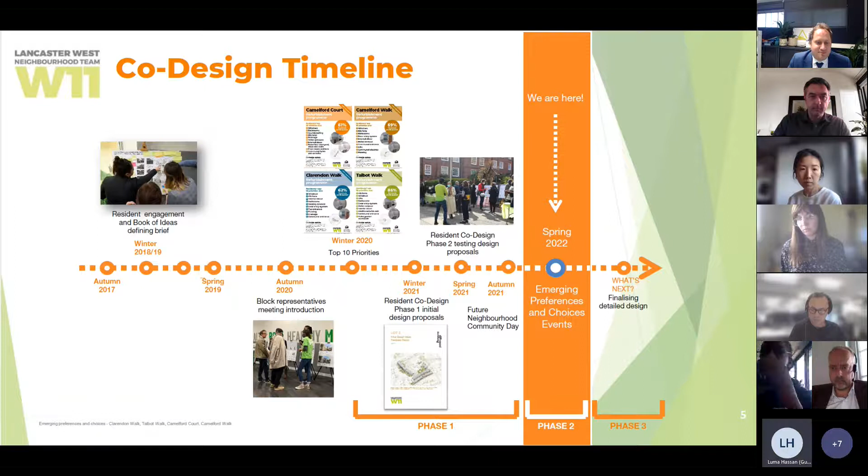Great, thanks James. So just a quick update. Since we last met at phase 1, and also at the Super Saturday event last October, we've been focusing on two key work streams. Firstly, we reviewed your feedback from phase 1 to understand what the key preferences were, so we can focus development in the right areas. Additionally, we looked at where there were concerns, as James said, and explored whether we could offer some variations or alternatives to address those.

So in order to develop the proposals, we needed to do a bit more data gathering to understand the buildings better. So the second work stream has been survey research and analysis, so we know what we put forward to you is potentially possible.

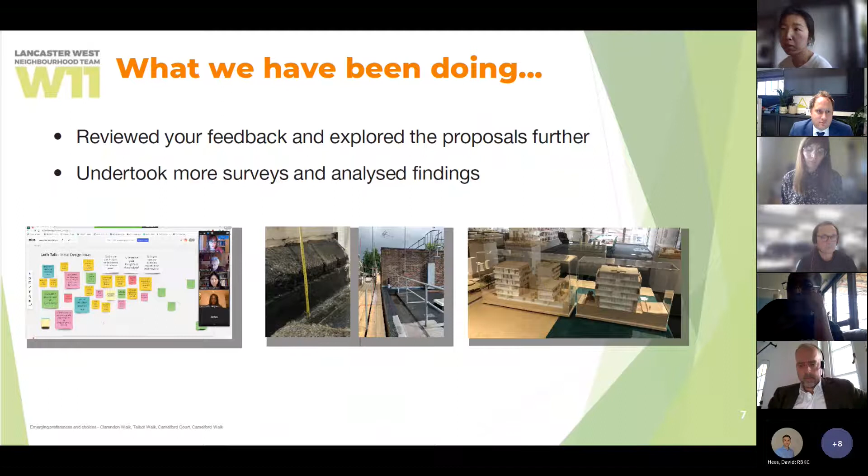So your top 10 priorities that you agreed and put forward to Lancaster West a while back are still at the core of the refurbishment. Today we're focusing primarily on the external envelope, and we'll be capturing some of those priorities, such as the windows, communal entrances, bin stores, and also the lifts, as mentioned.

So building on the initial ideas, the proposals we'll be showing you have been developed based on majority preferences and feedback you gave us at phase 1. This refurbishment is primarily focused on improving the thermal performance of your homes, and the measures we've focused on include window replacements, external wall insulation, floor insulation, roof insulation, and also opportunities to install solar panels and potentially green roofs if needed, and to look at simplifying the building envelope.

So we spoke about internalising some of the external corridors, the walkways, and the recessed balconies. But as James said, we also took on board concerns with those, so we've looked at alternatives as well to discuss with you.

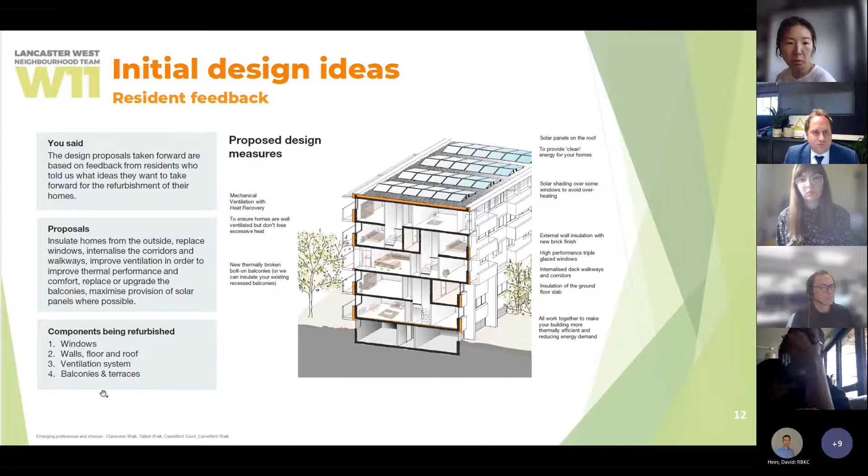So the first component we'll be looking at will be the windows. I'm just going to hand over to Vaya to run you through the proposals. You're on mute, Vaya.

Yes, thank you Emily. So regarding the windows, 90% of you were mainly positive about triple glazing, so this is what we will go forward with. 72% were positive about aluminium windows, and I'll go through the options you can have on the next slides. 71% were satisfied with whatever type of glazing is most efficient. As I said, we're moving forward with triple glazing. If we go to the next slide please.

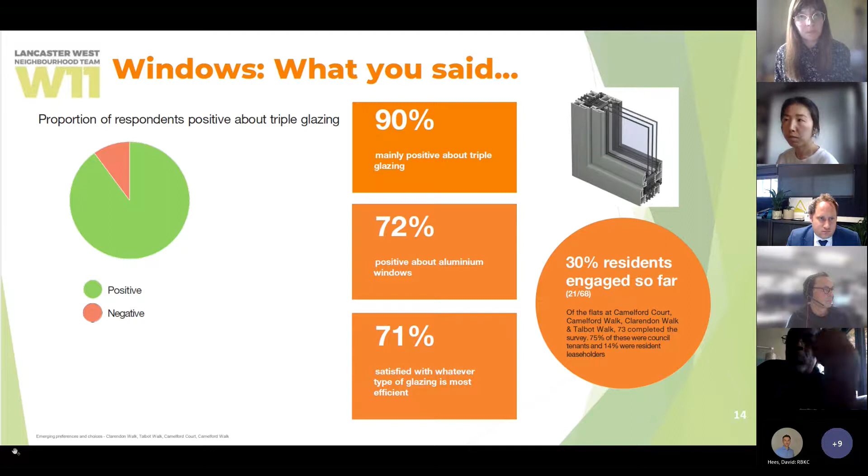We have mainly two options of windows you can choose from, and they are both triple glazed. They both have very good U values, meaning very good energy performance. They are both certified with Secured by Design, and have a design life of 60 years. The main difference is, of course, the way they open and the internal finish, and I'll go through that in the next slide.

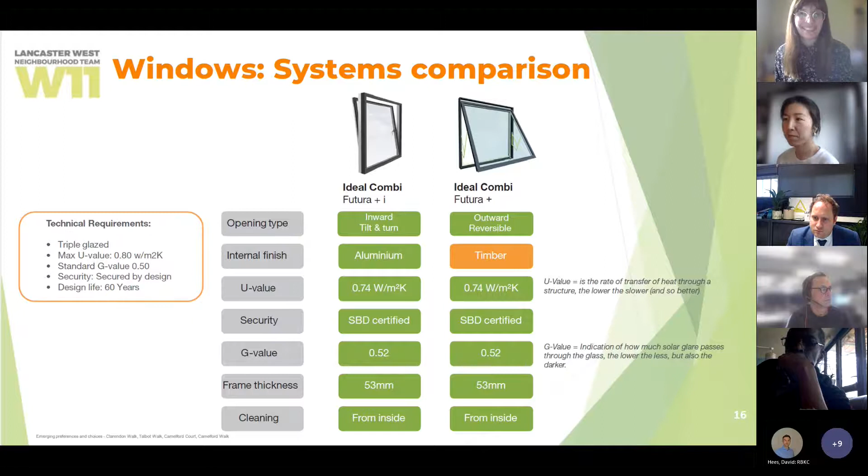Sorry, is this, there was one more, no? Okay.

So the triple glazed windows, as I said, are much better in terms of thermal comfort, energy savings, and soundproofing. Installing new windows will affect the appearance of the buildings, but we can keep them relatively similar to the existing ones if this is what you prefer.

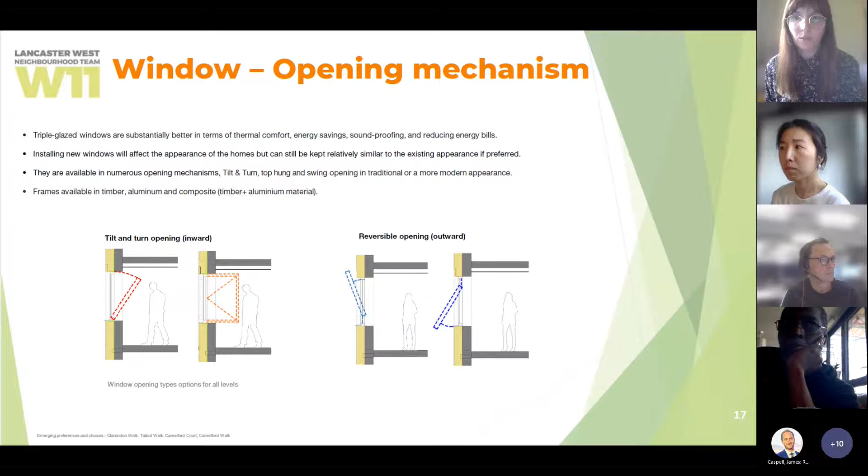There are numerous ways to open windows, but we are mostly exploring two of them: the tilt and turn opening, which is inward, and the reversible outward opening. I'll go through the frames now.

We know that the material preference was aluminium. However, the only window that comes in aluminium finish, both internally and externally, is a tilt and turn inward opening window. You can see in the picture how this tilts to open, and then you can also open it like a door, basically inwards.

The main disadvantage of this window is that any curtains or blinds that are not installed directly on the window frame may not work, because the windows go all the way to the ceiling. So opening the window will probably be prohibited by a curtain.

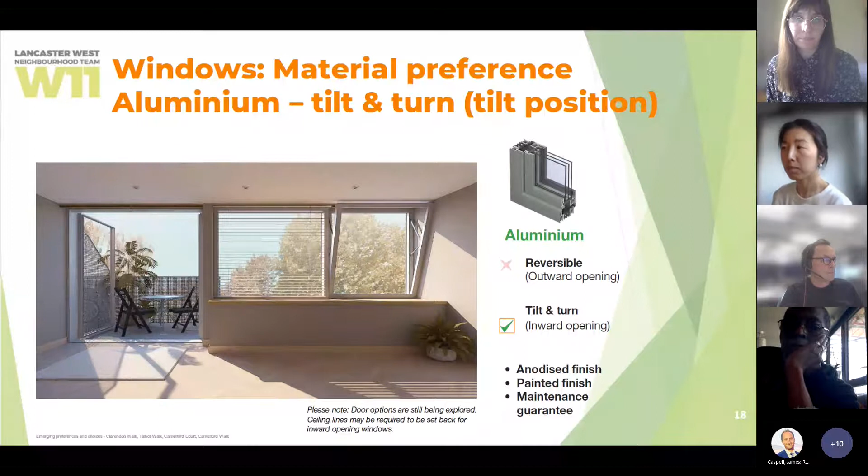So the other option is the outward opening window, which is reversible. This means that you can open it and at the end reverse it so that you can clean it from the inside.

These windows do not come in full aluminium, but they are basically aluminium windows with internal timber finish. That's the only timber in the structure of the window. This timber can come in various colors.

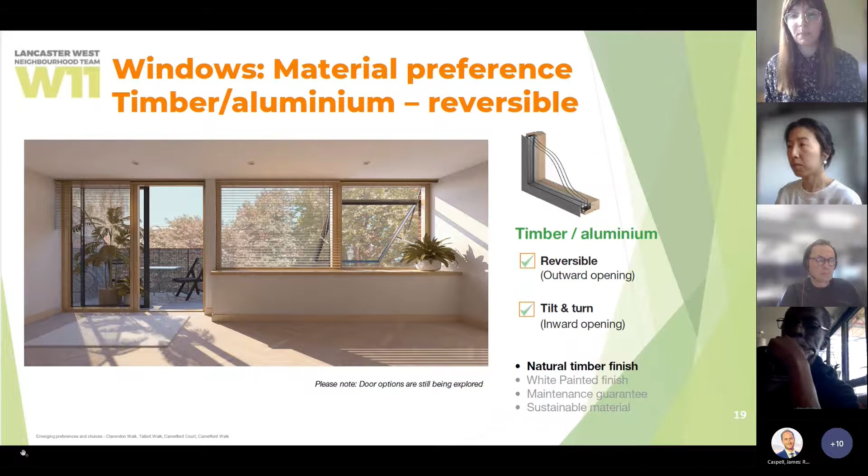If we see the next slide, you have the option in the survey to choose what color you would like your window to have internally. Generally, lighter colors like white, wood, or light gray are recommended, as it won't create a very harsh contrast between the window frame and the light coming from outside. But ultimately, it's up to you.

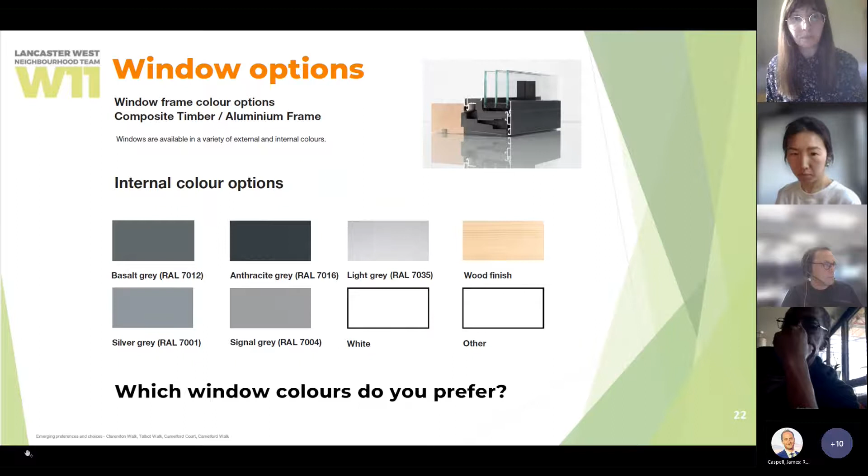So that was the windows. If there are any questions about the windows that you may have right now, we can answer them. Otherwise, at the end of the presentation, we'll also have time for questions.

Is there anything about windows here? Do you know? I'm trying to read. I think the flat, I think... I'm not sure what the wood finish is. It should be some sort of softwood.

But we can look into that and provide more information. You can go to Unit 29 at Baseline Studio and try out all the different opening mechanisms, and also see the finishes and how the timber looks like or how the aluminium looks like.

All right, I can carry on. If that's okay, and we can come back to more questions later.

Regarding the wall insulation, initially you were given two options. The first was internal wall insulation. The key considerations were that it would lead to some loss of internal floor space, longer disruptions in your home, and the improvement to thermal performance wouldn't be maximized, partly because we can only add up to 100 millimeters of insulation or less internally. The majority of you, however, have chosen external wall insulation, which means there won't be a loss of internal space, disruption will be minimal—just in terms of making good—and it will maximize the thermal performance of the building, but it will need scaffolding.

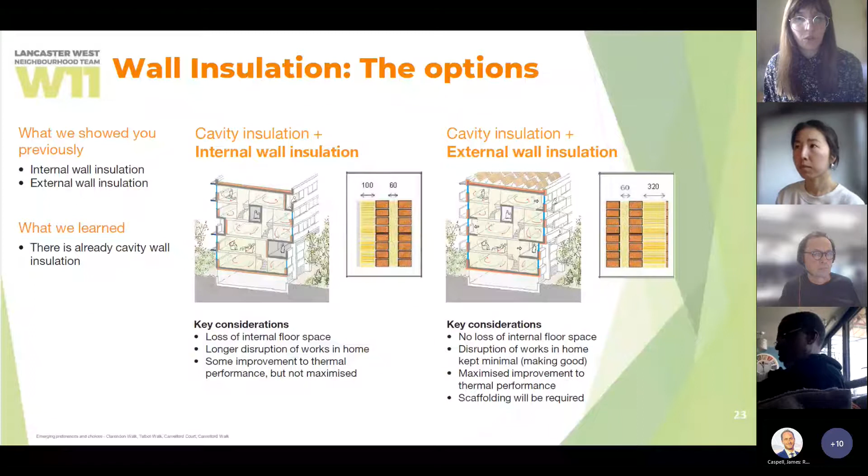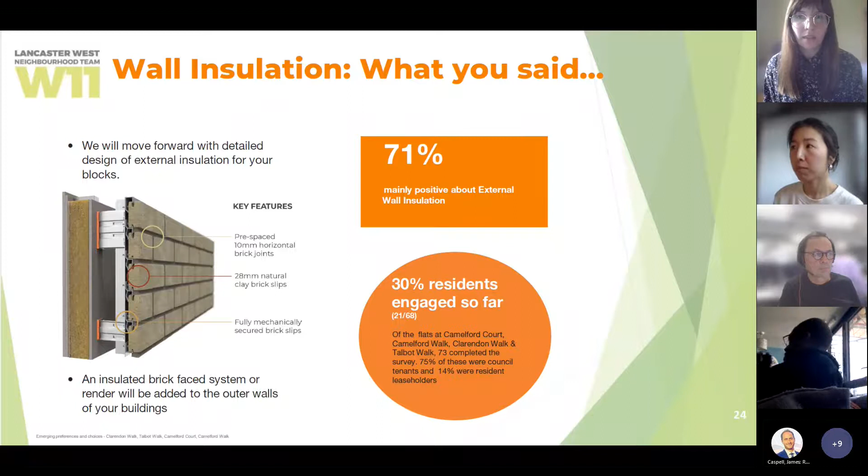As I said, 71% of you were positive about external wall insulation, so that's what we're moving forward with. We'll discuss the finish later.

The main impact of the external wall insulation is on the balconies and on your amenity space. There are basically two types of balconies around the estate. One is the terrace balcony, found on Upper Clarendon and Camelford Court, which is not covered with a roof. The second is the recessed balconies, found on Clarendon, Talbot Walk, and Camelford Walk.

The external wall insulation will mostly impact the recessed balconies. On these, you also have an option to choose if you want to keep it or go for a new bolt-on balcony.

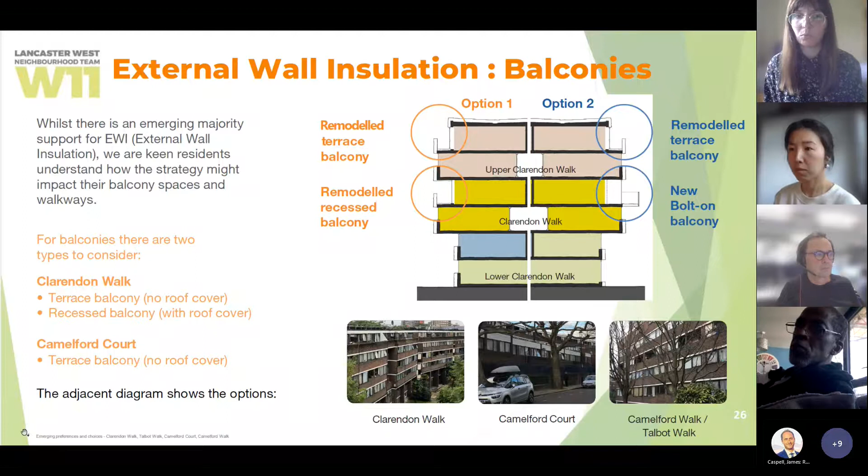So if you are in Upper Clarendon or in Camelford Court and you have a balcony or a terrace, be assured that your existing terrace will be retained. We will insulate the floor of the terrace and raise it as a consequence. This means there will be a step when you go outside to your terrace, as there already is, but there won't be a step down.

We propose the doors to open outwards, and we also propose to demolish the existing brick balustrades so that we save some space and keep basically the same area that you currently have.

There were also concerns about divisions between the different apartments, as currently there is no division, and it is something we are discussing and will probably provide some privacy separation for.

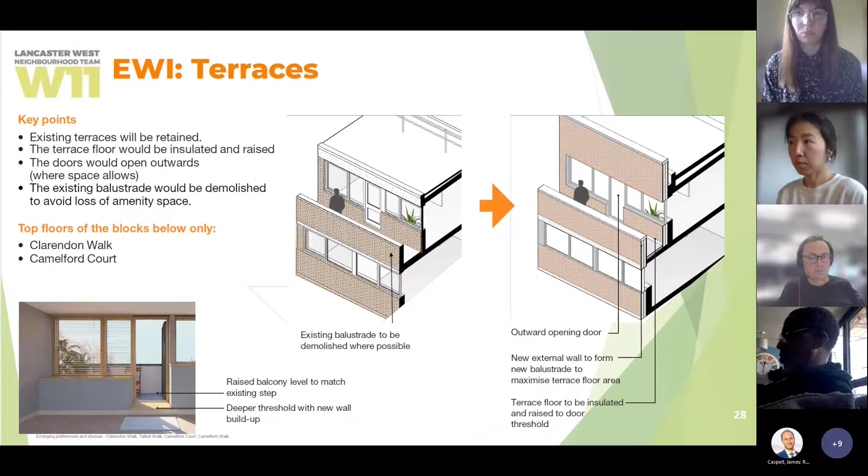So this is about the recessed balconies found in Camelford Walk, Talbot Walk, and Clarendon Walk. Option one is to retain the existing balcony and to redefine it.

We propose to reorient the access leading to the balcony to go directly from the main living space, and propose new sliding doors so the space of the balcony is used more efficiently. We also propose to demolish the existing balustrade again so that we regain some of the space we lose because we are introducing external wall insulation.

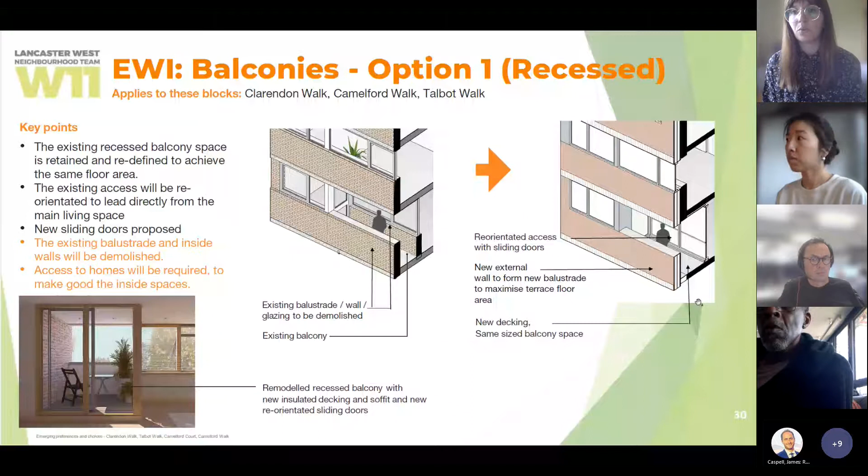To keep this option, we will of course require access to your homes to make good the inside spaces when we remove the existing windows and walls.

Option 2 for these balconies is to internalize the recessed balcony. So you will gain more floor space in your flat, and then we provide new, larger bolt-on balconies with outward opening doors. We propose perforated metal screens that will provide some privacy, but there won't be a roof cover.

To do that, again, we will need to demolish the existing walls and remove the existing windows, so the disruption will be more or less the same. However, with this option there may be extra disruption if we need to open up the existing external walls to add additional support that may be required for this type of balcony.

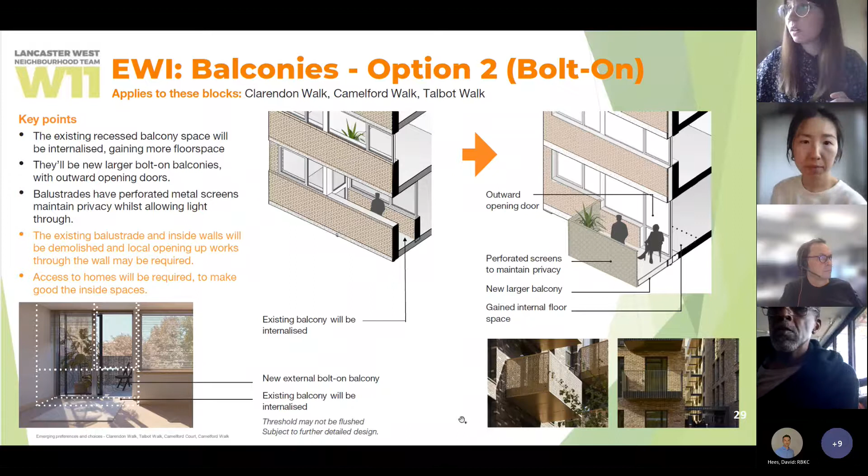Next one, please. Lee. Next one. Sorry, it's just a bit lagged. Oh, is it frozen? Okay, should I? Is it showing yet? Still see option 2, not communal walkway. Yeah, I could maybe switch. Sure, if you've got it up. Yeah, let me switch to that. I don't know why it's stuck. Oops, is that all right? Can you see it?

Yes, okay. So the next amenity space is the open walkway, which is on Lower Talbot Walk and Camelford Walk. Again, there are two options you can choose from. One is to keep the space open and retained. We'll try to insulate the floor and the soffit as much as possible.

But of course this will result in less good energy performance for your homes. The other option is to internalize these corridors, turning them into internal space, achieved by installing windows between the existing piers.

The outdoor space will be removed, but the thermal performance of your homes will be maximized. One comment was regarding the windows from the bathrooms or kitchens currently looking onto the corridors. Since we will provide new mechanical ventilation to your homes, you won't require these windows for ventilation. So these windows will have to be fire rated and fixed, but we will make sure they are not required, at least for ventilation purposes.

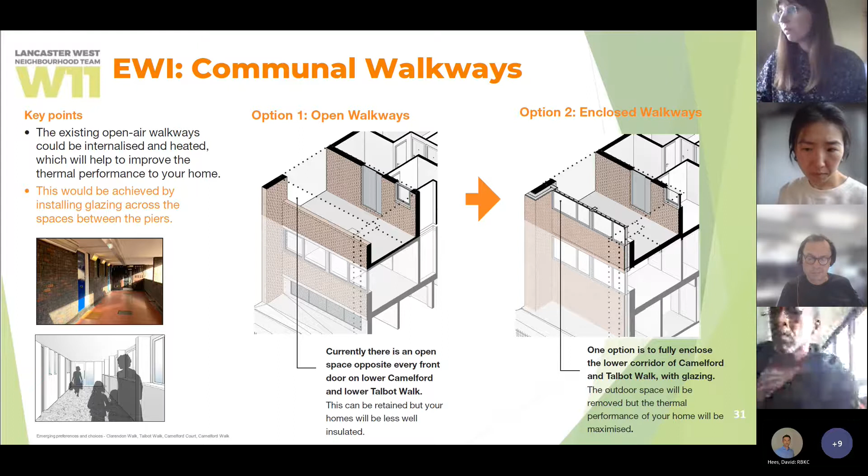So just to summarize your options, if I can start with option D, because this one is the most similar to what you have right now, and you can choose to keep that.

The result will be that the energy performance of the building won't be maximized, especially the lower flats, the ones with access from the walkway, which will be the most compromised. In order to meet our targets and proceed with refurbishment, we will need to add insulation to your floor voids, which is part of the internal refurbishment, but it's a crucial step to make sure these apartments perform well.

The other extreme is option A, which is to add bolt-on balconies and internalize the walkways, which will result in the most energy efficient and green building. But we understand that this will mean loss of some amenity space and more disruption potentially.

Options B and C are a combination, so maybe the upper flats will choose to go with bolt-on balconies and the lower flats will choose to internalize the walkways, or vice versa. But generally the decision won't affect your resident - whatever you do with your balconies or walkway won't affect the energy performance of your neighbors that much.

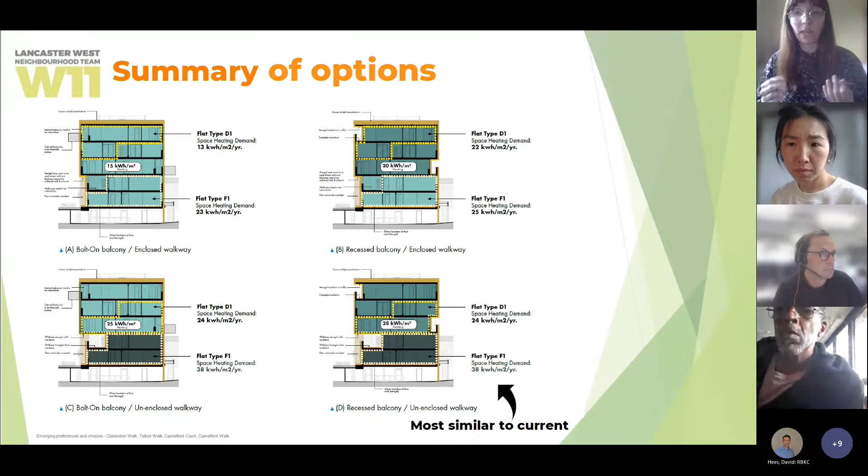Also, we did an overheating analysis of the blocks, based on the proposal. We know there are overheating issues at the moment in this state, but this will be resolved and addressed. After we do the refurbishment, the only apartments that seem to have some problems are the upper Clarendon flats towards the south.

In order to limit the possibility of overheating, we will need to introduce some solar shading above the terraces. This will be a perforated shading - it is not providing a rain cover. The design of this shading we will develop further later on, and any comments are very appreciated.

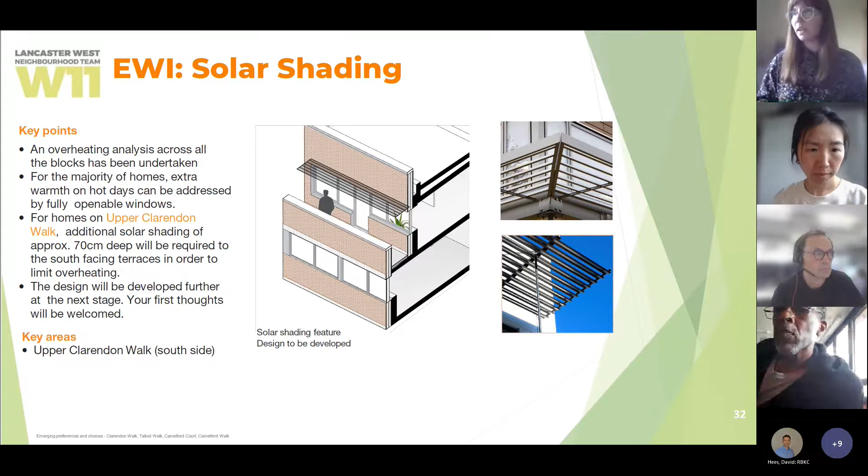The next section is external wall insulation. If there are any particular questions, I can make a pause and look at the chat. I think Emily has already responded to one - we're addressing some of the questions in the chat. We can continue on, and I'll hand over to Simon.

Hi everybody. This slide looks at external wall insulation, and the options we've been looking at are: one, using brick as a facade, and the other, a render system, which is generally a more affordable system using render. The key bit with brick is it's very robust and durable, and we've got a couple of choices of types of brick, which Harry's already picked up in the chat - we'll come to that in a minute.

One of the questions raised is about having genuine bricks or artificial bricks, so that's one thing to consider. The issues we're probably going to talk through with the render are really the color and what is the most appropriate color, and what is the change of character to the estate.

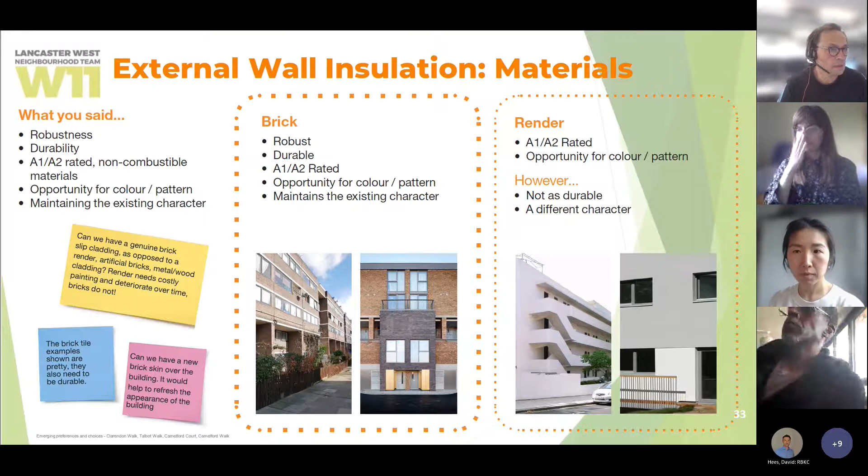With the brick tile system, it is a brick material that looks like a brick, but to those who are discerning, you may not think it really looks like a brick. It's a slightly cheaper version. It has a steel or stainless steel carrier, so it's very durable, but it is a different type of brick because of the way it clips in.

On the second picture, the brick slip system - those are actually cut bricks, fired brick material, so they're much more natural looking, and perhaps a greater range is available depending which ones we pick, as there's more than one brick slip system available. We'll come to the images in a minute to see the colours. These get pointed up in the traditional way, so you'd get the appearance of brickwork.

On the render system, the render is fitted to the insulation, which is mechanically fixed back into the wall. You can see a little circle where there's a disc which clips through into the brickwork in your case, and that's a fairly conventional system. The issues there are really about the weathering and maintenance and how it appears in the long term. Next picture please.

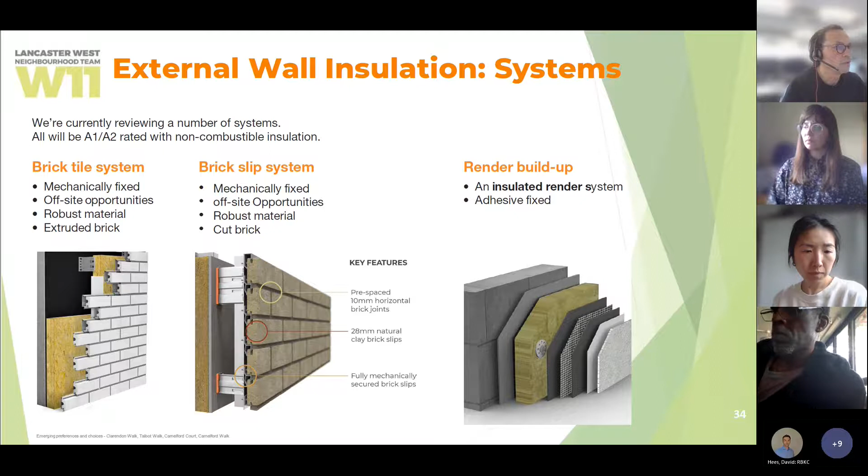Brickwork then, depending whether we've got the most natural brick or the tile brick, generally the appearance will be more in keeping with the character of the existing building.

What some residents had talked about was trying to make the appearance a bit lighter, so we could pick a lighter brick or get one that's as close to the original, which has some good qualities. It's perhaps a little weathered and needs cleaning, but we could get something to match the original brick color, perhaps with a sample test to get it closest to the original color it started off with.

So a lighter red brick is one way to go. We'll come to some other pictures in a second. The main thing we're highlighting here is a more expensive system than the render. The staircase we'll come to in a second - that's a different type of tile system, but also would be a brick module.

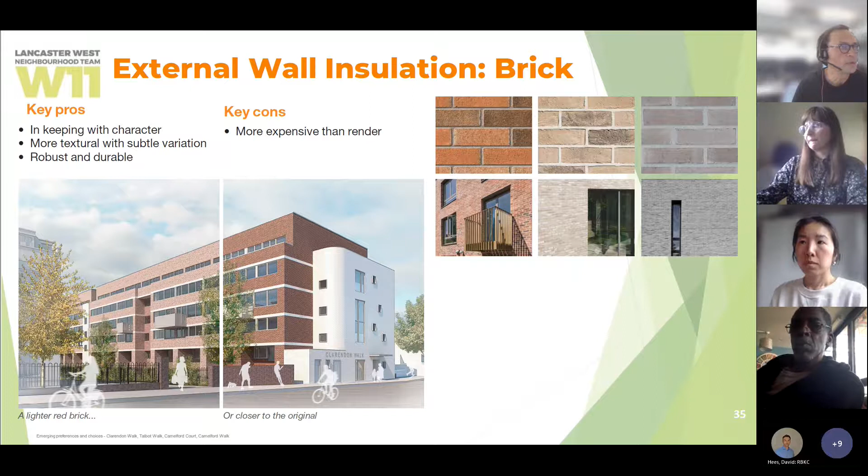So there's examples of a lighter brick, buff brick, which is becoming quite a characteristic of new buildings in London. It's a kind of mixture of bricks, not a uniform color - a multi brick that's pale buff, and one here that's more grey, perhaps a slightly sharper look, giving a bit more contrast with the white bands. The white bands, which are a current feature, we would endeavour to retain, as they give some character and tie in to the staircase area.

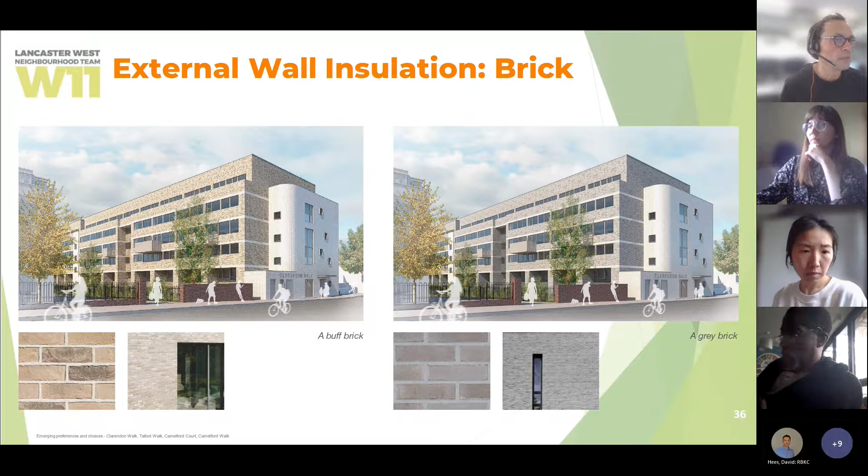We've also hinted at some other colors heading towards green and so on, but there would be more issues there, I think, with planning, and a lot to do with the overall residents' opinion as to whether that's the right move to go for. I think the issue really is about the maintenance.

Where you've got the exposed parapets without much for coping, you do get more weathering. It can be slightly hard to predict - you can get streaks and marks. So being able to wash clean the render is something that would be quite an issue.

I think there are some good examples, but there are certain kinds of coatings you can get for the render which make them more self-cleaning. So probably a bit more care is required in how it's installed, but because we've got quite a flat surface, it's hard - unless you've got string courses or projections - to throw the water clear to improve the weathering.

It does have some advantages - it's maybe easier to install. But with brickwork, we'd need a steel frame to support a lot of the brick slip carrying system, so there's a bit more disruption involved in doing brick. The external wall insulation and render is perhaps a more straightforward thing to fit to this building.

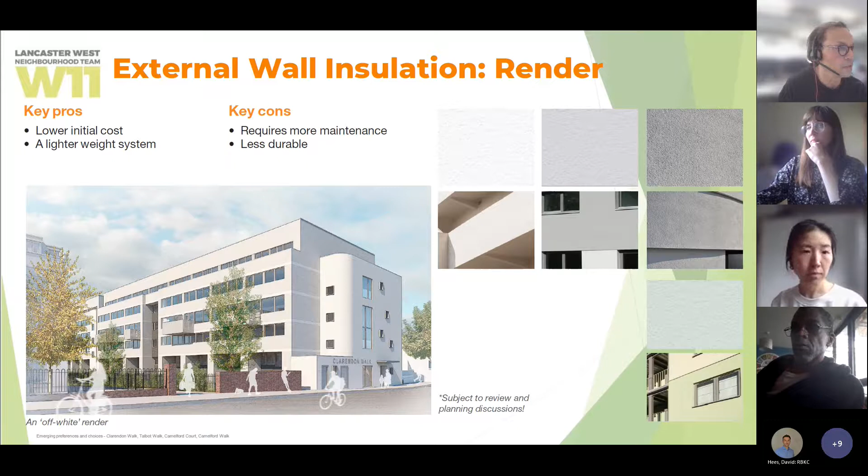Next one, please. So it would be useful to get a sense, we've got some comments in the chat, of what the preferences are in terms of bolt-on balcony - that's one question that was coming up. And views about render versus brick, keeping it to that simple choice to start with, or perhaps the difference between a brick tile and a brick slip.

Just trying to look through the chat. Some commentary about graffiti, that's very true - it's quite attractive to apply it if it's accessible. Brickwork seems to be a good comment, and there's support for the idea of a lighter brick choice.

Emily, anything else to add there? I think we've covered that point. Yeah, I think that's all good. I'm going to take everyone's comments on board.

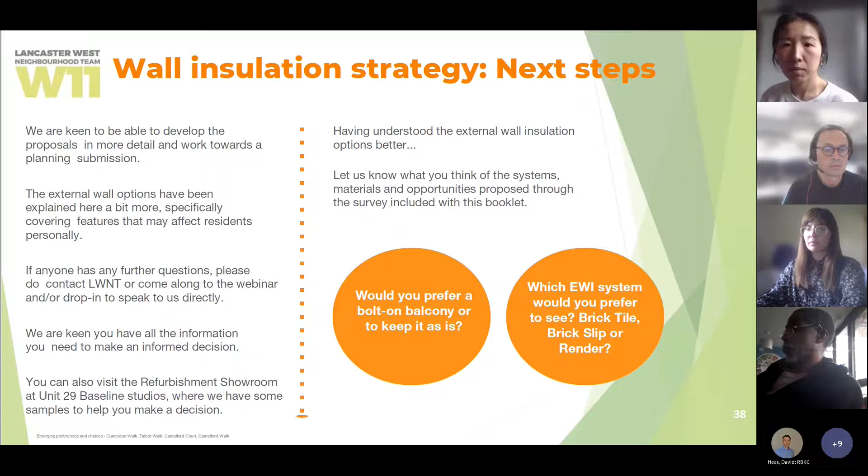Sorry, the next slide after that, where are we going to? Onto the roof.

The roof works you've probably seen have been going on. Clarendon and Talbot are currently on site, and Camelford Court has been finished.

The main aim here, as one of the first stages of the work, is to get the wrapping of the building done with insulation on the outside. So we've been adding incombustible insulation, which would be extended over the parapet to become part of the external wall insulation, giving a continuous blanket of insulation over it. So the first stage is being done.

The next part would be to do solar panels. Solar panels can be used to generate some electricity for the benefit of the estate and to reduce bills. There are various ways that cost can be shared around with residents so their overall costs are reduced.

Solar panels add some weight, although they are relatively straightforward to fit in certain places. Green roofs add a little more weight again, but they're very good at adding biodiversity and helping to keep the buildings cooler. In some situations you can do both. I think loading constraints here are such that we couldn't combine the two, but that's certainly a trend on other projects.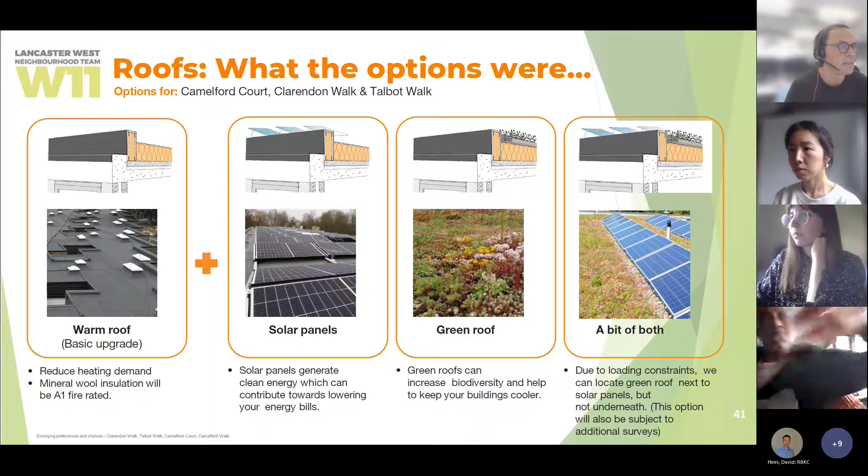For Camelford Court, there was a wish for some green roof, partly because you can see the roofs from Camelford Walk, so there's some enjoyment to be had breaking up a long line of solar panel installations. So far that roof work has been done - the heart motifs have been installed, and the PVs, the solar panels, will follow at another stage.

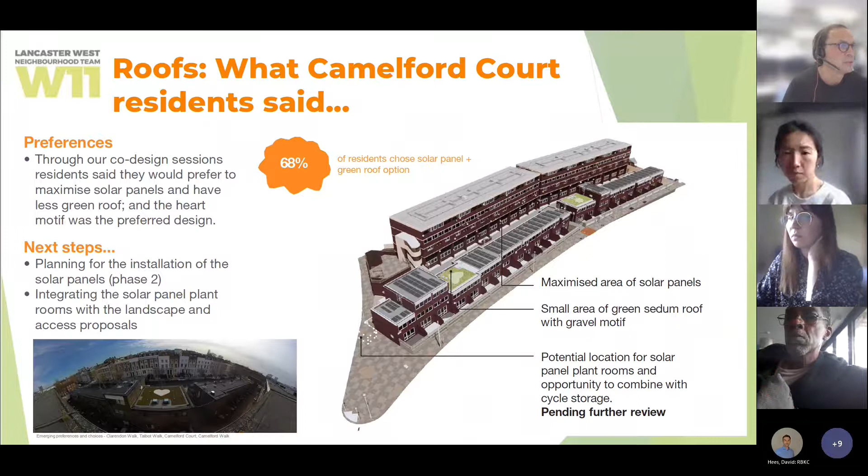Here we've had reviews with Clarendon Walk and Talbot residents, who've been keener to have the solar panels in preference to the green roofs. Also, there are some limitations to how much the existing structure can take, because we've been using an incombustible insulation - it's actually quite heavy and becomes quite thick, so there are extra loads added to the roof. So we're at a limit really. We can add the PVs as shown here, but in this case the residents weren't particularly keen on the green roof, so it's been reasonably straightforward to complete this work. These two jobs are now well underway.

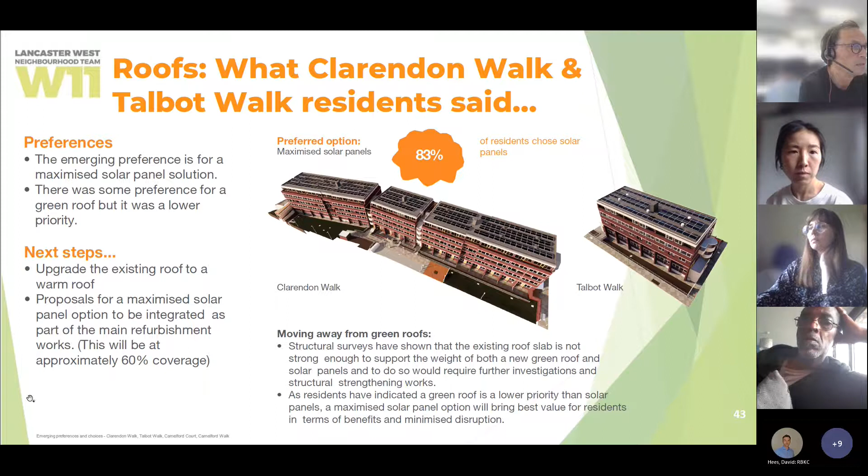We wanted to check in with Camelford Walk residents - I don't know if there are any here in the seminar or webinar, it'd be good to know your thoughts. We're trying to check in about whether to do just the warm roof, or to add the solar panels, or to consider some green roof. We'd like to offer that choice because we've done the same process on the other blocks. In this case the green roof is still dependent on a structural survey, to check how the existing concrete is bearing up once we take into account the new insulation.

I don't know if anybody's come through on the chat. There's commentary about the green roof and additional maintenance - that is true, there would be some maintenance required periodically to check on the green roof.

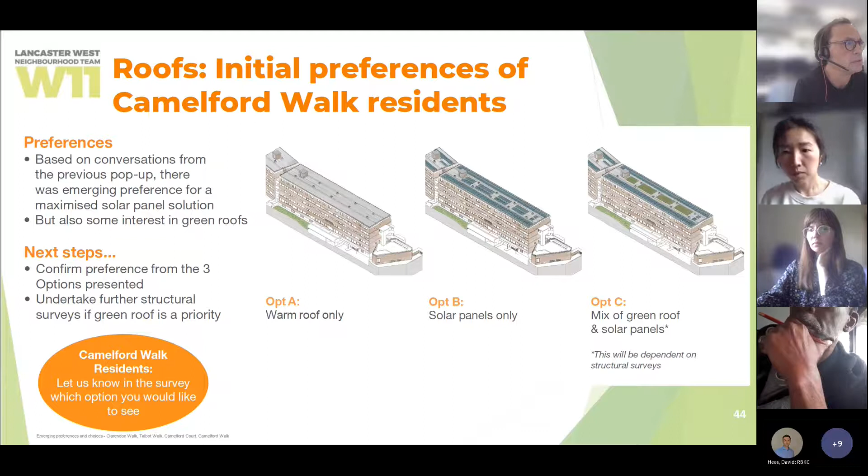So we're moving on to ventilation now. With all the thermal upgrades in place, we need to make sure you've got good ventilation in your homes. This is for general well-being, as well as trying to keep humidity and mold risk at bay. So every home will need a new MVHR system. After phase 1, 57% of respondents said they were generally supportive of the proposal.

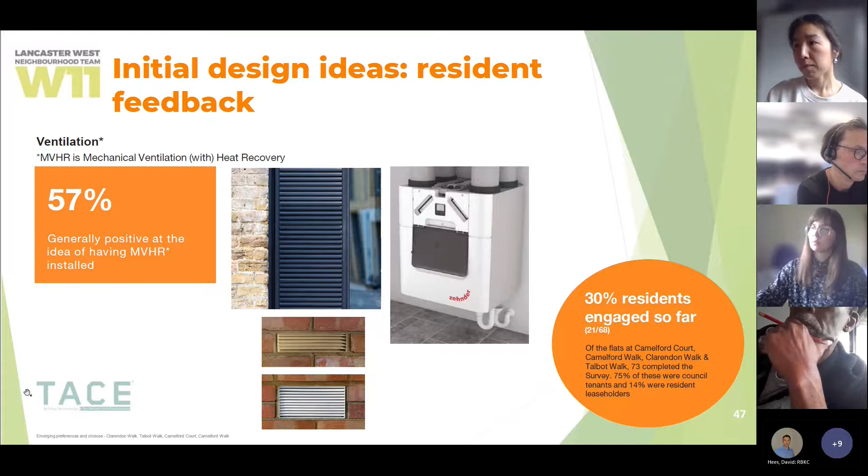Just a quick recap - MVHR, what is it? It's a mechanical ventilation system with heat recovery, and it brings in fresh air and extracts already stale air, but it does it in a controlled way so you don't lose any heat from your homes.

The way it works is that when the warm, stale air is moving out, the heat that you've warmed up gets transferred onto the cool air coming in, and this gets distributed around the home. So you get a controlled incoming fresh air, keeping all the heat in your home constant, and keeping your level of comfort as you like it.

In addition to bringing ventilation, it also has additional benefits. There's a filter, so when fresh air comes in it filters out allergens, some pollutants and odours. There's been anecdotal evidence of people with MVHR systems feeling better in the home, especially if they have allergies or are asthmatic. It also helps avoid humidity problems, prevents mold growth, and gives a slightly more even distribution of fresh air, so you don't get drafts, and it's a comfortable temperature and humidity across your home generally.

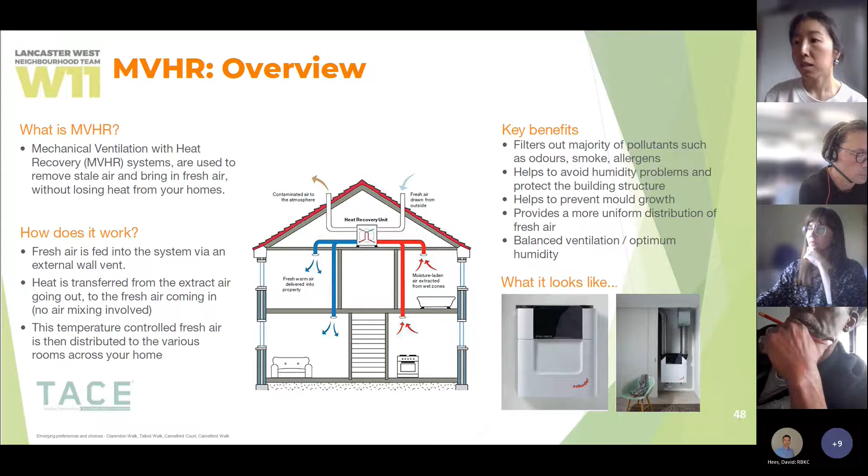So a number of systems have been explored by the M&E consultants and mechanical and electrical engineering consultants. They've taken quite a few things into consideration, looking at size and sound power as well. At the moment, we are considering the two highlighted options, and this is being trialled across the estate in different pilot

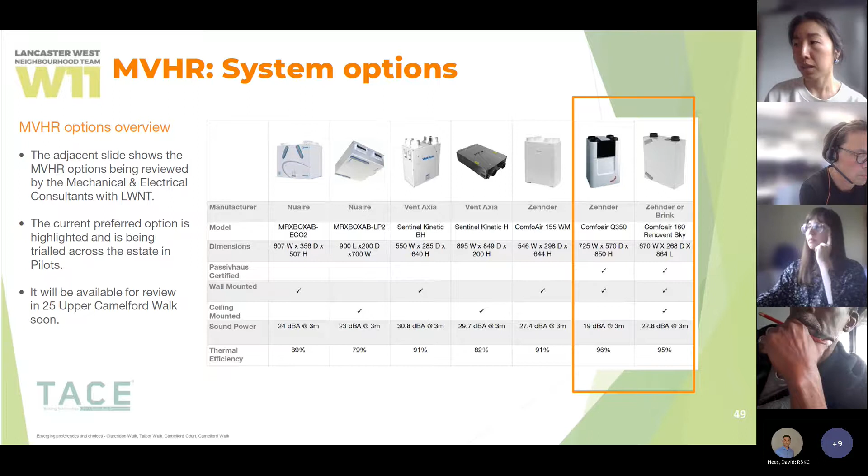flats at the moment. Next slide, please. So this includes 25 Upper Camelford Walk.

Previously, when we introduced the MVHRs to everyone, there were some questions and concerns about raised ceiling heights, noise, and storage space. So the pilot would trial out the MVHR systems and look at the areas of where we put ceiling drops.

Where we can, we'll try and minimize disruption to the internal layouts by placing the ductwork over existing kitchen cabinets, so that's hidden there. And where we need to, we keep them to the side of the room, so you see a bit of a ceiling drop, sort of bulkhead, which keeps the rest of the room free.

And if they're bigger drops, then we'll try and localize these in bathrooms, keeping them to one end of the room so that the majority of the room is kept as high as possible. In the majority of flats, the system will be stored in the current utility cupboards to try and minimize any further taking of storage space.

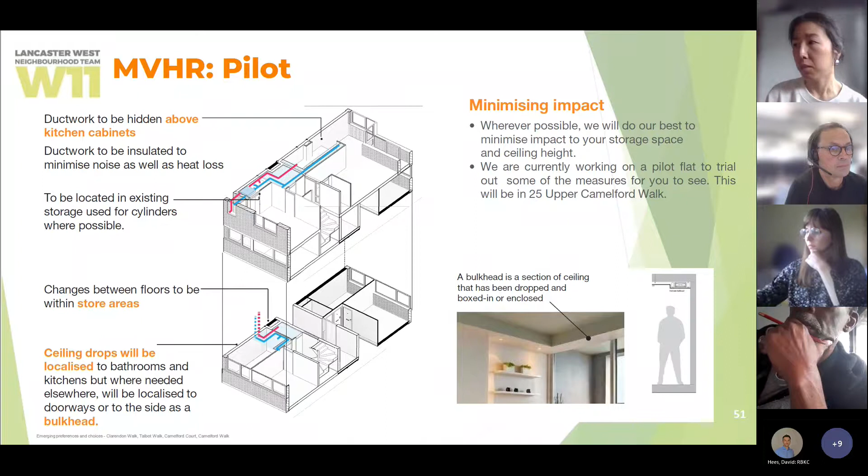Next slide, please. And that's apart from Camelford Court. For Camelford Court, where you have the existing porches over the entrance doors, those will be removed when we put the new EWI on, and we will be re-providing the cover over your doors.

What we found was that there will be an opportunity to build in some storage as part of this porch cover. So there may be additional storage there to house the MVHR system, and this will free up the space from the homes. Not every home will be able to have this on Camelford Court because of the limitations on the external space, but the majority will.

So we're trying to minimize disruption in that case. It would be good to get some feedback from residents of Camelford Court, just to see what you think of the porch idea, and also first thoughts on materials and what you think of the external storage as well. Next slide, please.

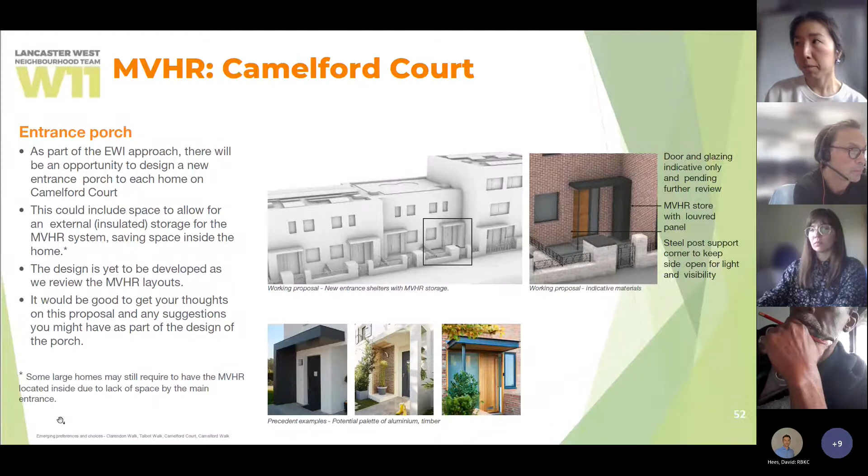As we mentioned previously, we're looking at internalizing the corridors to simplify the thermal envelope. The walkways are also proposed to be enclosed because this will bring the maximum thermal improvement to the homes, particularly the ones coming off the walkway.

As part of this, the bathroom windows will have to be fixed, and technically this wouldn't be a problem because the MVHR will be providing the new ventilation and extract. But we do recognise some residents may find this difficult to accept, and also they may see the space as amenity space. So we have explored this, and it can potentially stay as an external space if that's the preference of residents, particularly coming off the walkway.

The main implication is that the homes coming off the walkway will be slightly less thermally efficient because there's obviously less insulation to buffer the home there. Next slide, please.

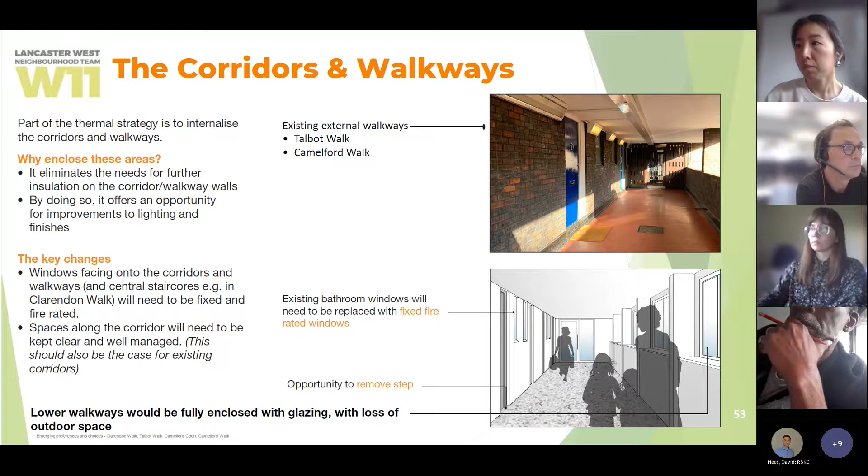So the next steps for the corridors and walkways: the corridors we will look at a little bit more and develop proposals for stage 3 co-design. The pilot flat will trial out the step removal that we spoke about in previous co-design sessions to see whether this is a feasible proposal, and we'll touch base with you again at the next co-design for that.

In the meantime, we need to prepare proposals for planning. So the key thing we need to take from this phase 2 is to understand whether the walkways want to stay open or if there's a preference to completely enclose them. Next slide, please.

Okay, so moving on to waste, lifts and entrances. New lifts are proposed to each block.

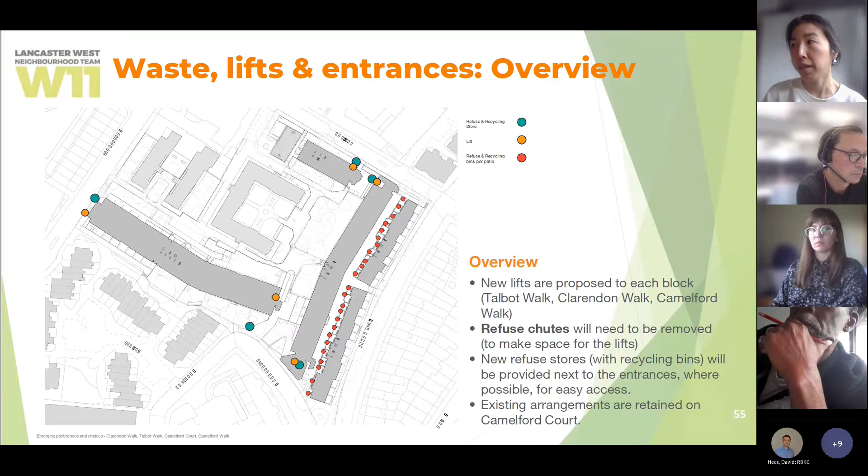Clarendon Walk will get 2 lifts, 1 on each end. Camelford Walk as well, 1 on each end, and Talbot will have 1 new lift. We'll also be looking at new refuse stores by these new lift locations, as part of a holistic refuse and entrance strategy. For Camelford Court, the existing refuse strategy works well, and residents are happy with it, so there's no change there.

Starting with the lifts, the key challenge is that for delivery of them, we need to make sure the stairs stay open as a second means of escape. So there's a challenge of delivery in that first instance. We've looked at that, and we believe there's a way we can deliver these lifts.

The other challenge is that there's very limited space. We've managed to fit the lifts in, however there is very little scope to maneuver and adjust, so it is what it is as we've presented it. There's also a limitation on structural capacity, bearing in mind we've got to work with the structure provided by the stair cores, and that it's sitting over the basement. So there's only a certain amount we can do with the enclosures and extra load onto the area.

But there are opportunities, and part of that is to create a holistic experience - a new entrance where you come in and have lifts and stairs, plus a new refuse store next to the entrance, clearly lit and accessible, all in the same area. This will also help create better wayfinding for the entrances, and there's an opportunity to weatherproof the stairs. The main compromise is that we have to lose the refuse chutes to make space for the lifts.

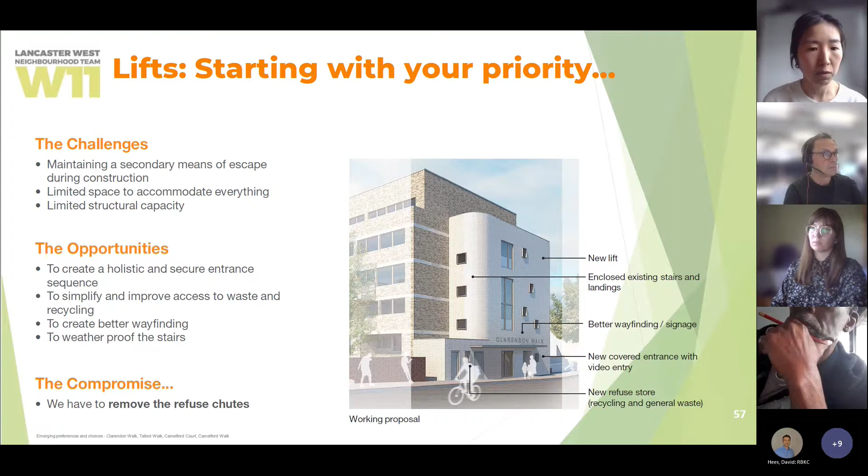We've looked at two approaches: enclosed or unenclosed. In both, we keep the existing stairs, but there may be some remodeling at ground level so the entrance to the stairs and entrance to the lift face each other. We looked at enclosing it in response to previous feedback from residents concerned about the weather, rain and water coming onto the stairs. That's one example of how we might go about enclosing the stairs.

The other option is to keep the stairs open. The pros of this are that you keep the character of the stairs, there's high visibility, and less enclosure means less construction, so there's less cost building it. With the enclosure, it's a new look and you do weatherproof the stairs, but it's slightly more construction, so there'll be a higher cost involved. It all depends on what your key priorities are.

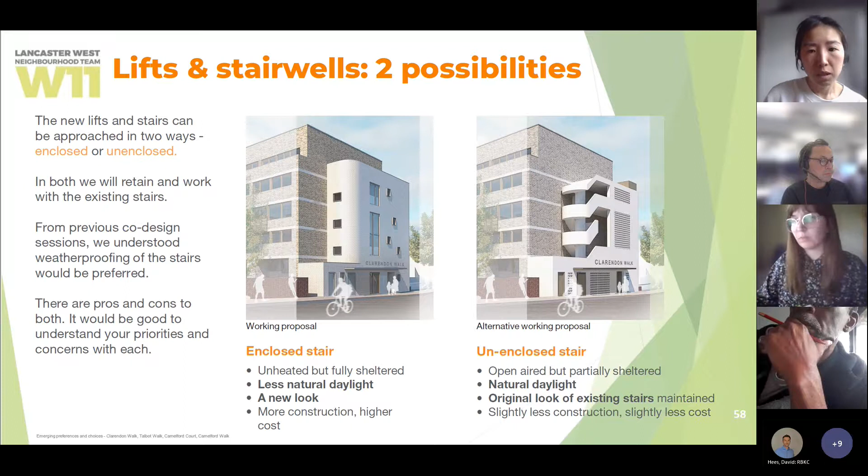As part of the new lift proposals, the way they interact with the ground floor means that where there are ramps, they will need to be demolished or at least remodeled. For Camelford Walk, this is a view looking down Camelford Court towards Lancaster Road at the other end, with the ramp removed. So there are opportunities to open up the landscape as well as part of that proposal.

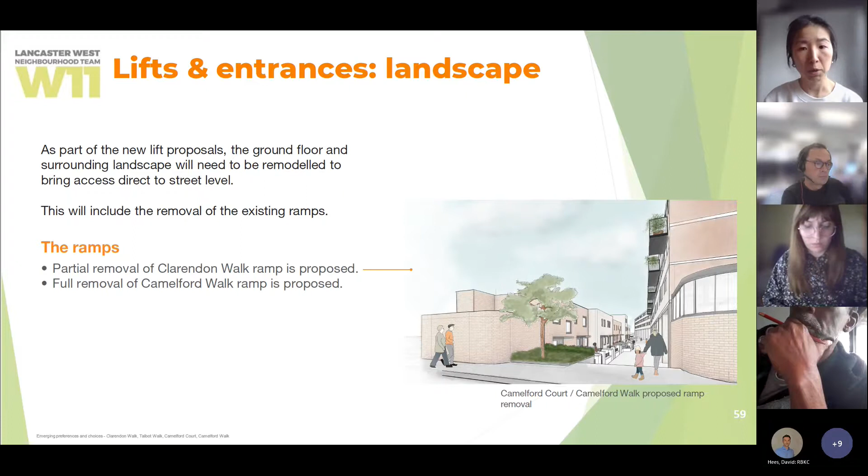For Clarendon Walk, there will at least be some remodelling, or ideally, if part of the landscape strategy, we could remove the ramp as well.

Focusing on waste and recycling, comparing what you told us previously and how our proposals are responding: following phase 1, 83% of respondents were positive about having recycling areas in the block, so the proposals with new bin stores will include recycling facilities, everything in one place. Regarding the refuse chutes, 43% were open to replacing the existing bin chutes with new lifts - not a majority, but only 22% were against losing the bin chutes. The simple fact is there isn't enough space to have both, so it's either new lifts or the refuse chutes, and that's one of the key decisions we'll need residents to advise us on.

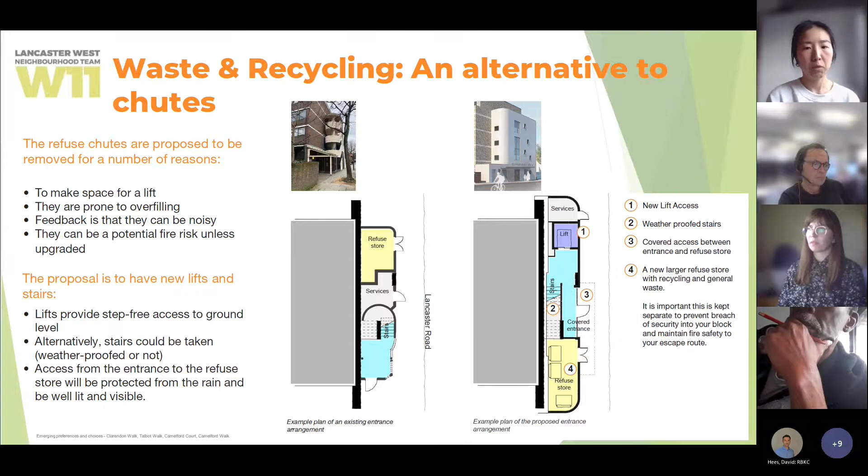So just to explain the new refuse strategy, apart from making space for the lifts, there are other reasons for removing the existing refuse chutes. We've had feedback that they are prone to overfilling and that they can be noisy. It's also a fire risk, and they would need to be upgraded if kept. The way we try to make the new refuse store more convenient is that with the new lifts it's step-free, so you come straight down into your new entrance, and there'll be a covered access route towards the bin stores, with general waste, recycling, and potentially compost all in one location. So it is a compromise, but we've tried to make it as convenient as possible.

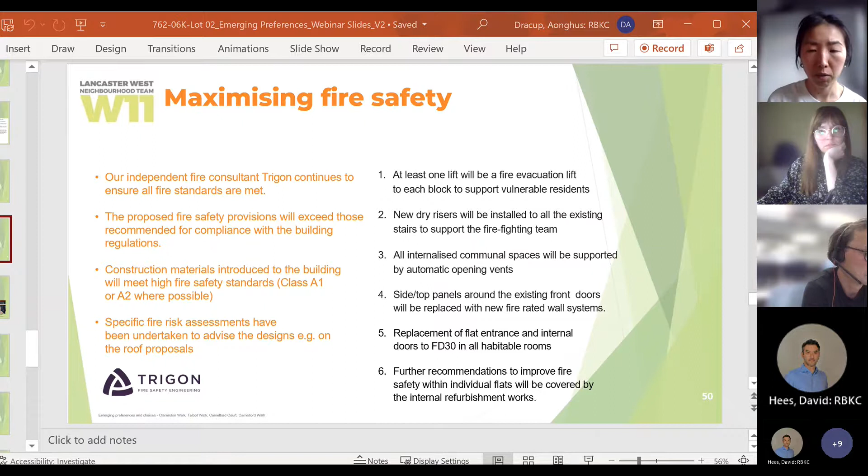Are you sharing or am I sharing? No, I think you were sharing. Because I thought you shared, so I stopped. No. Okay, let me see if I can put it up. No, let me share again.

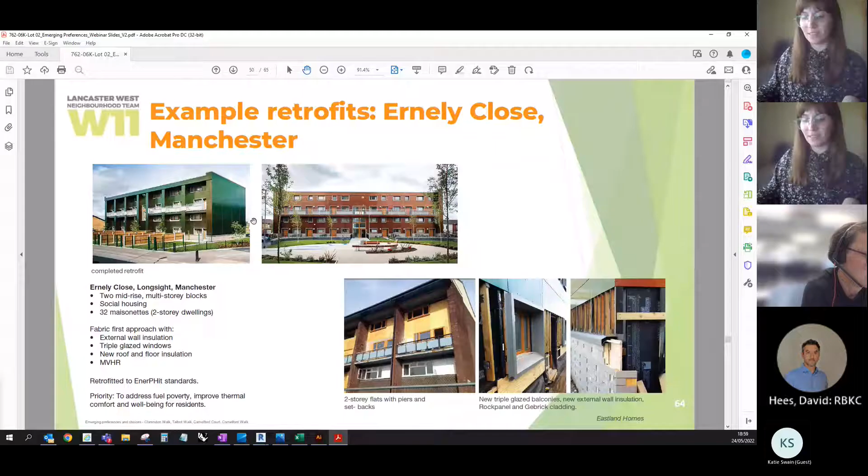Yes, just the one before on fire safety. Just to run through—yeah, and then new doors. I believe that's all part of the fire door replacements happening at the moment. There will also be some recommendations for inside your home, and these will be captured by the internal refurbishment works team.

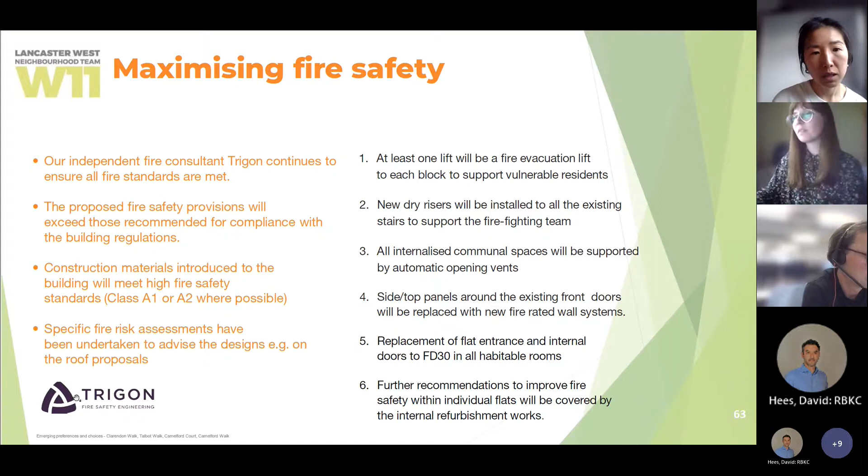So, the next slide. Finally, it's just to give you an example of another retrofit that is similar in terms of the kind of measures incorporated. This is Ernely Close in Manchester. It's a multi-apartment block composed mainly of two-storey duplex apartments, and it has similar issues of cold bridging—you've got piers, you've got slab edges coming out—that all need to be addressed.

They were working to the same sort of aspiration, so this achieved PassivHaus EnerPHit accreditation. They used external wall insulation, triple glazed windows, new floor and roof insulation, and also installed MVHR systems. The primary priorities for the project were to address fuel poverty and improve the thermal comfort and well-being for residents. So it has been done before, and it is achievable.

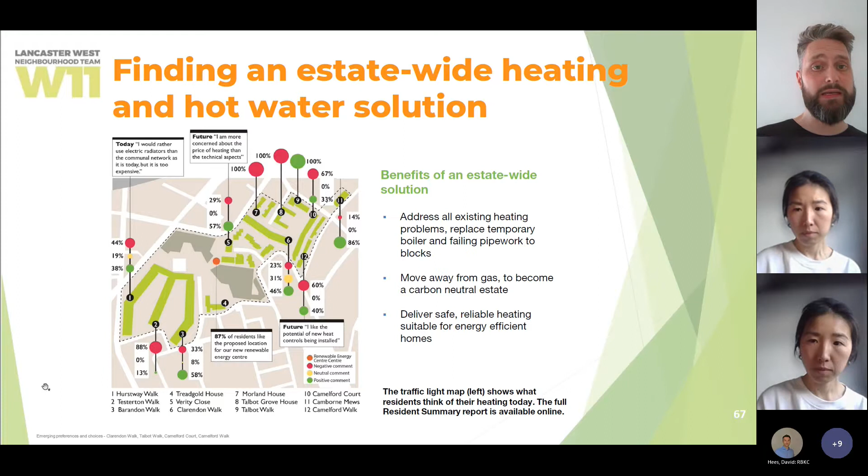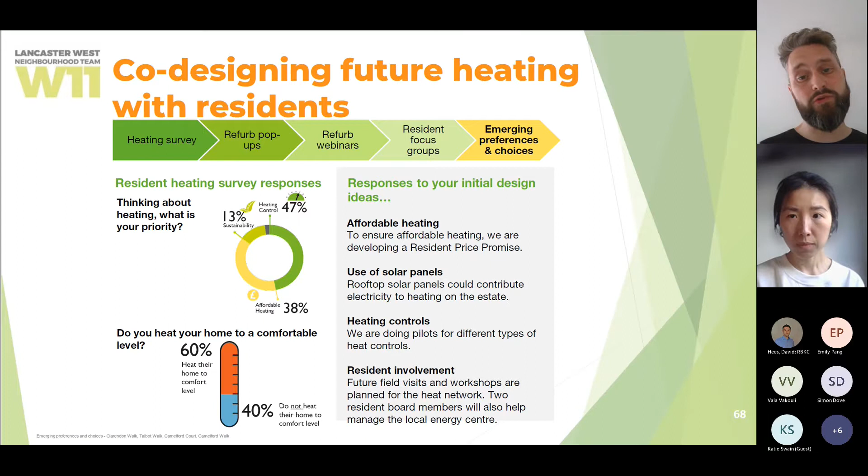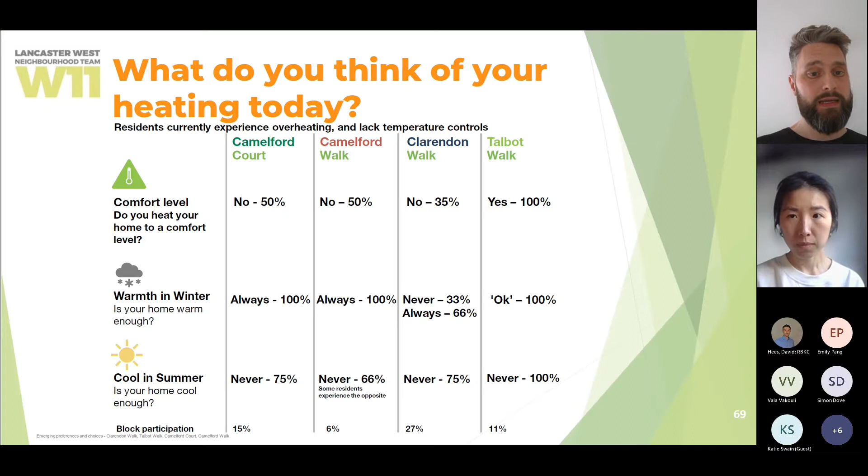So again, last slide on resident engagement and what residents are currently feeling today in terms of their heating and hot water experience. Comfort levels down the left-hand side - warmth in winter, cool in summer. Along the top you'll see the different blocks and how your block has provided commentary to us on those different areas. You see a real mixed bag about how people are feeling about their heating and hot water, and how they're using their property and their heating currently.

So that resident engagement and feedback, and how people are experiencing their heating at the moment, has led us to this - and also all of the analyses we've done. We've had a team of people working over the last 18 months to identify at a high level what are the options, what energy supply we have in the local area, and what feasible options we could potentially use.

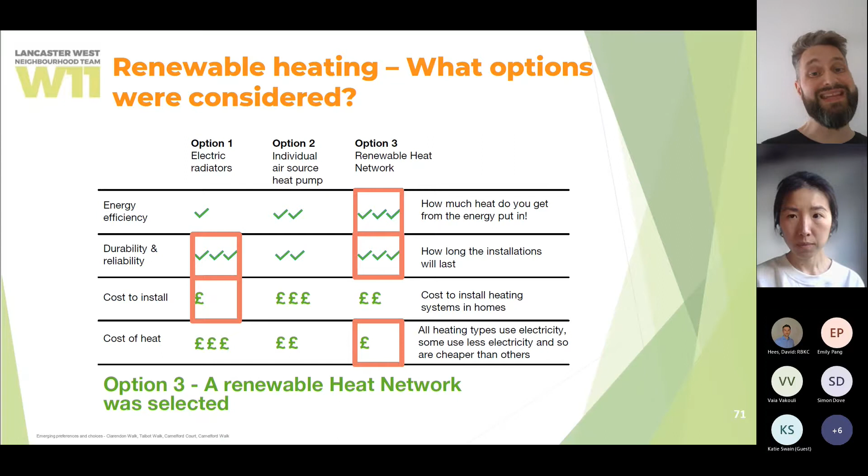3 options were shortlisted: electric radiators, individual air source heat pumps in every home, or renewable heat network. On the left-hand side you can see how we've scored those options - energy efficiency, durability, reliability, cost to install, and cost of heat. As you'll see from the red boxes, we've selected the best of those indicators. Renewable heat network comes out as probably the best option, and that's the one we've chosen based on feedback from residents and the analysis we've done on all the indicators you can see there.

So what is a renewable heat network? Effectively, it's largely what we have at the moment in the blocks that you live in. It is plumbing at scale, pipework underneath the properties, and power generated by our local energy centre. A renewable heat network is effectively the same, but with renewable technology providing the heat, delivered through the pipes to individual buildings and homes.

As I mentioned earlier, the government is committed to removing gas from properties across the country by 2035, and is looking to phase out individual and gas communal boilers. A heat network can replace gas boilers and will work with wet radiators like those in the homes across the estate that we have at the moment. So we're replacing like for like, so to speak, in terms of what's in the property at the moment.

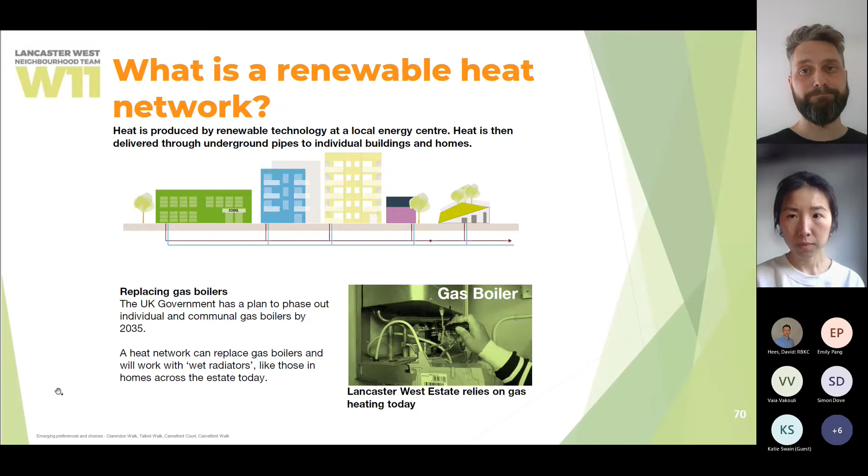So how does a renewable heat network work? We have a local energy centre based on Lancaster West. This supplies renewable heat using a large air source heat pump. The pump requires electricity to produce heat - 5 to 10% of this could be supplied by rooftop solar, as we've talked about previously. This heat is delivered to properties via underground pipes, hot water. A heat interface unit in each property transfers heat to your radiators and can supply instant hot water taps. So the energy centre supplies hot water to properties, that's transmitted via a heat interface unit, and then that supplies instant hot water taps.

How do we bill? At the moment you pay a flat fee to the council. Going forward, we're looking to introduce individually measured billing to each home. That is backed up by a government dictate that if we're installing a new heat network, we have to meter and bill each individual home going forward.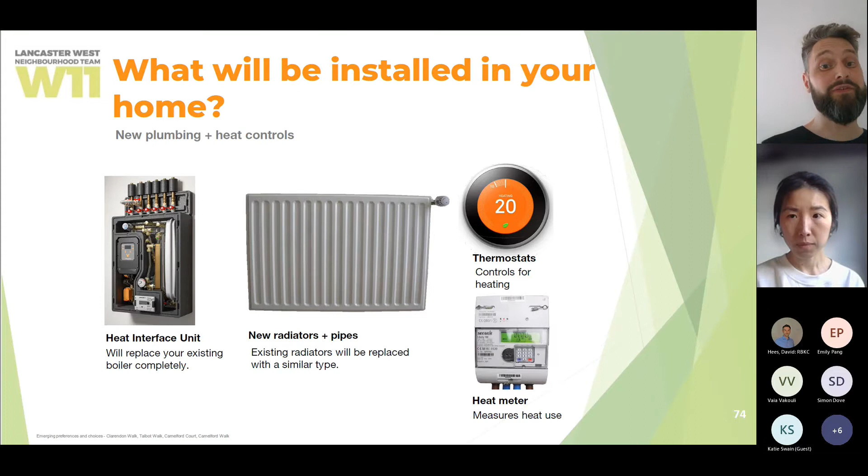So in summary, what do we see today and what will a new heat network provide?

In terms of radiators, new radiators will be installed. Hot water, we'll be working on the water pressure and improving that. Heat controls: smart heat controls will be available in every room all year round. At the moment, you pay a fixed amount to the council for your heating, based on the number of bedrooms. But in future, you'll pay for the heat used in the home to the council.

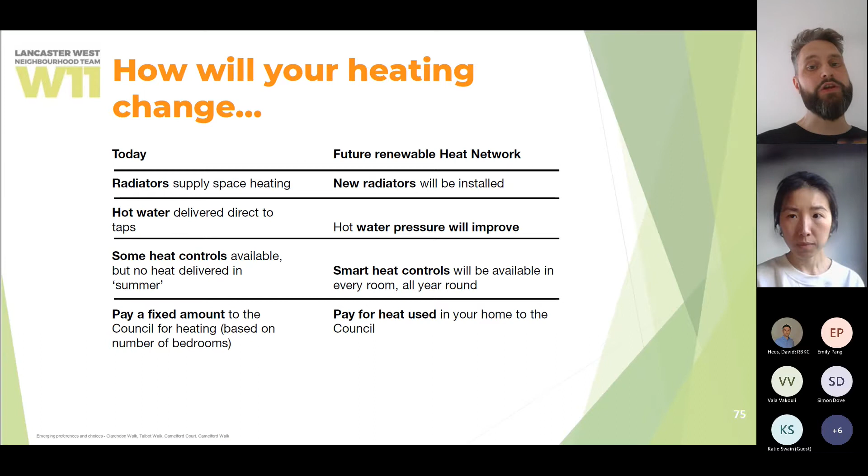So I guess the question is, when will this become available? When are we looking to roll this out? Well, in terms of what's going on in people's homes, we're actually doing some of the work now. The internal refurbishment is starting to replace radiators and pipework in properties as we speak.

The new energy centre is on track to be constructed between 2023 and 2024. Each block will start to connect from 2024. There'll be a phased approach across the estates, and not every block will connect at once. There'll be resilience in place to make sure we are managing the supply to each block as we do that rollout.

The earliest connection, as I mentioned, is from 2024. That's the earliest we can do it, because we're going through procurement of a contractor to deliver the works, and then they're going to construct the works, and we'll look to roll out in sort of 2024.

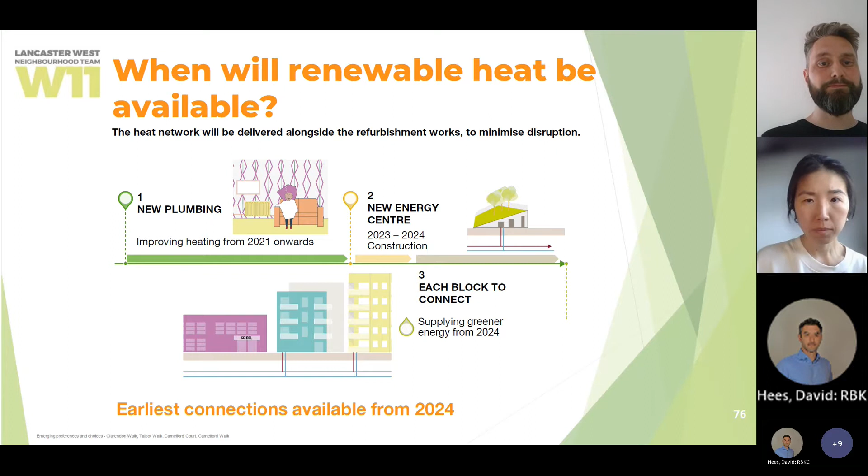So just another slide on what it means to you. New heat controls in your flat, smart controls available to each flat throughout the year, so an end to overheating. Replacement of pipework in your home and communal areas to prevent heat loss and overheating. Improved reliability - we're making a big play on making sure this is the most reliable heat network that we can make it.

Outages will be prevented by replacing pipes between each block and the energy centre. We're making sure the pipework we install is absolute quality, and that we've got backup in case of energy fallouts, making sure whatever we do is high quality - that's quite key.

As I mentioned, new metering and billing to meet the UK legislation. Heating will be on a pay-for-use basis, and we're looking to engage with residents on the pricing of that heating as we go forward.

And then, electric cooker offer - residents with a gas cooker will be offered an electric alternative. This will support the ambition to make the estate carbon neutral. We recognise that could be a pinch point for residents, and we're looking to make that offer to residents as we go through.

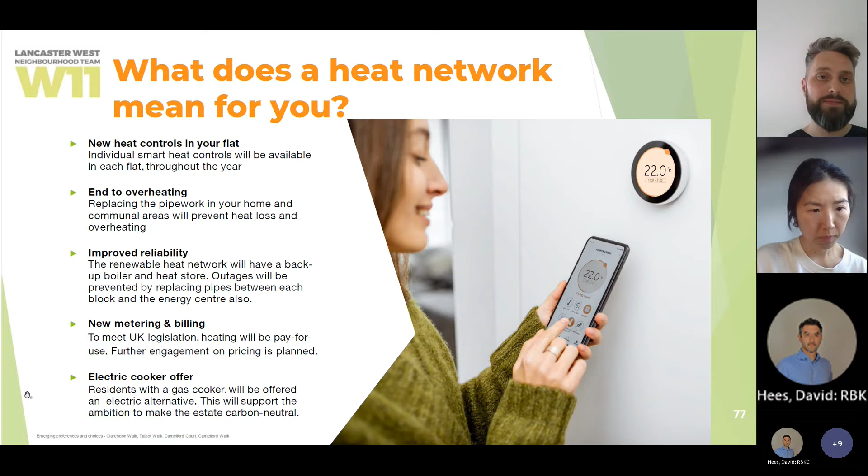Next steps of the project: continue to engage with residents through this next phase of engagement that the refurbishment team are doing. We are looking at the designs for an energy centre location and what it will look like, so another opportunity for residents to feed into that, with lots of communication and engagement around that.

Resident field trips - we had a field trip to Bunhill in Islington in January, just for staff as lockdown was still in place. We're looking to develop future field trips to other heat networks, and there'll be some communication on how you can get involved in that if you'd like to.

And we're obviously looking to trial heat meter installation so that we can start to understand the impacts on resident usage, how residents feel about that, and start to prepare people for that change. I guess all of this is going to take place over the next few months as part of the phase 3 engagement, and dates continue to be confirmed.

If you want to get involved, contact Janet. Janet's our resident engagement lead on the heat network, stakeholder engagement as well. She's keen to engage as many people as possible and to develop heat network champions. So if you're interested, want to learn more about it and be involved further, please drop Janet a line or drop any of us a line, and we'll funnel that to Janet so you can get involved. I think that's all from me, David.